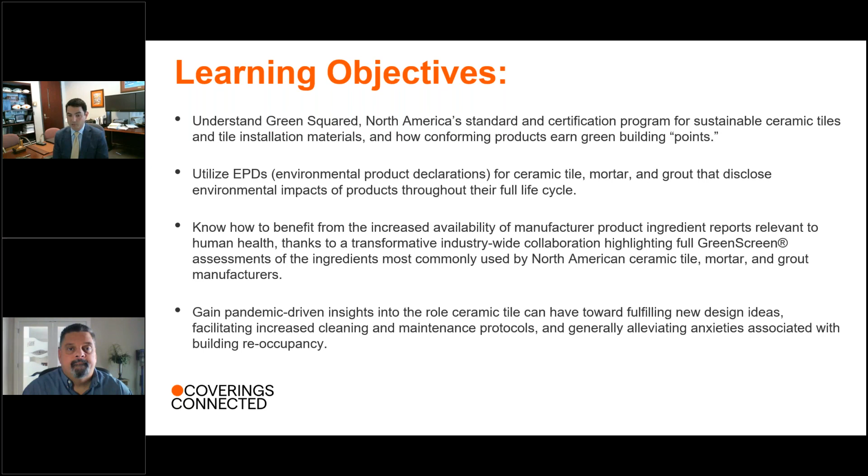Just to set the stage for our conversation, you should know sustainability, and green building in particular, is a vast landscape, as I'm sure many of you have experienced. It's not just the environment when we talk energy, atmosphere, or resources anymore. It's also what products are made out of, how that product ingredient information is communicated. It's also the general well-being of occupants of interior spaces, everything from what they're exposed to with the product to how the product is maintained, especially today from a sanitation standpoint, and how all of this translates into how products are specified, evaluated, and ultimately integrated into green buildings in their design, architecture, and use. All of this comes together with the backdrop of increased consumer awareness, and what's important to society is more mainstream today than ever as it relates to green building.

So we'll walk through all of this, and just to start, keep in mind some key components to consider when we talk about sustainability. Obviously, there's the environment.

That's kind of what kicked off this whole green building discussion years ago, and almost around the same time, human health became just as important, if not more, than the environment when it comes to what designers and specifiers look for in products and how products work together. It's not just the products themselves, it's products and how they're integrated into systems and buildings and their design and use. And the suppliers—what kind of information are they providing, and how transparent is this information regarding the products, what they're made out of, how they impact the environment and human health.

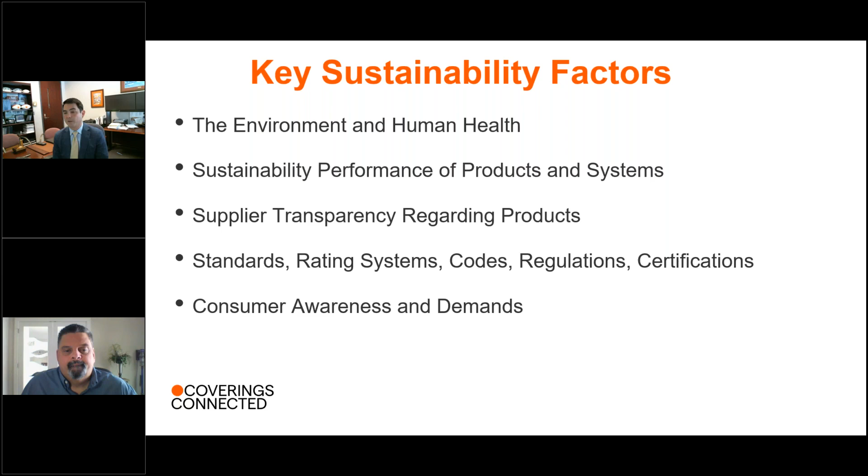So let's try to paint a picture. In doing so, from an environmental standpoint, it's important to understand where we are and where we're going. But first, to do so, it's interesting to look back and think about how we got here, and take a walk down memory lane.

Environmentalism as we know it today can be attributed to the late 60s, early 70s, when a couple of accidents that really had harm on the environment spawned new initiatives such as Earth Day in 1970. In the decades that followed, you saw a general increase in social awareness on environmental issues. This inherently translated not just to everyday life, but also to the buildings and architecture that we're exposed to every day.

I think I saw a study one time that humans spend the vast majority of their life indoors—something incredible, like 90% of their time alive is spent indoors. So of course, the products and buildings we come into contact with are important, and also their impact on the environment.

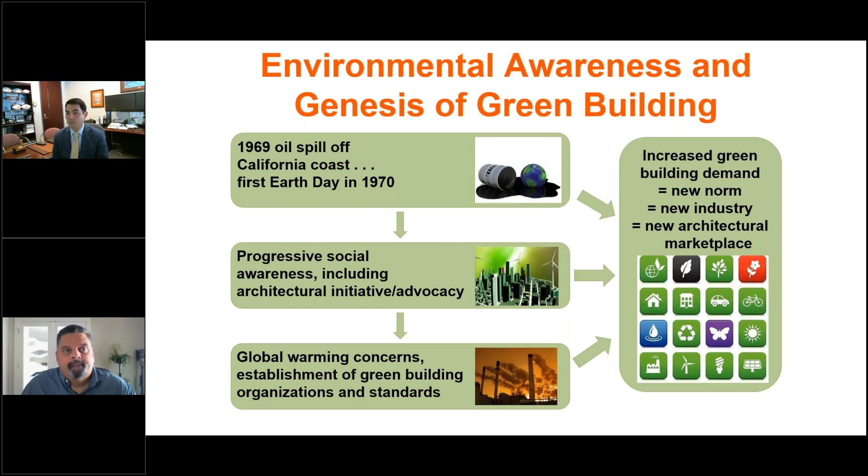Naturally, as we progress toward the close of the 20th century, green building as we know it was established, and it's carried on into the 21st century, now two decades in. Not just global warming concerns, but also human health concerns. All of this gelled into the idea of green building standards and rating systems, which, as you can imagine, changed the market for ceramic tile, but also all other building products. It's really a new marketplace that we're dealing with today, and it continues to change every year.

Similarly, on the health side, if we take a look back, it wasn't too far after environmental issues took off in green building that health issues also took off, most notably early on, the subject of VOC emissions. This is interesting to look back on—the subject of VOCs came to light in the Clinton administration with his executive order. Within one of those orders was the greening of the White House.

That became an interesting case study because shortly thereafter, you saw the formation of the U.S. Green Building Council, and almost right off the bat with LEED and other green building rating systems, VOC and VOC emission criteria were integral. So this was the first departure from just environmental issues into also human health issues.

And then as we got through the early 2000s, you saw this translate over and carry on into the schools and how we're designing schools. The State of California had a big role in that leadership. And then just recently, five or six years ago, you saw the Formaldehyde Act signed into law, where federally we were restricting formaldehyde limits in wood-based composite products.

And you saw the EPA really crank down and enforce those issues. So again, it wasn't just voluntary—you saw some of this written into law.

And in the background of all of this, you saw increasing consumer demands, not just for the environmental aspect, but also for reporting of health information around products. And you're definitely seeing that spike today with the pandemic in the landscape.

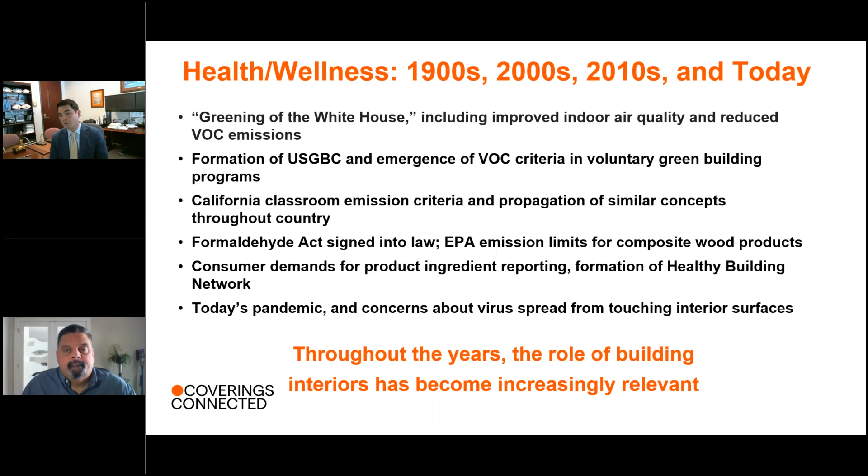So let's shed light on that a little bit. If we look at some of the drivers for why we're so focused on this today, of course we have standards and rating systems. LEED is a big one you hear a lot about, but there are a number of others, which we'll go through toward the end of the talk.

We have codes now, specifications, so it's not just voluntary, it's integrated into the way buildings have to be designed per code. It's not just the building design itself, it's also purchasing and procurement. You see federal recommendations for how to pick the most sustainable products, both from an environmental standpoint and a health standpoint. And you see consumers really driving a lot of these initiatives. There's a lot more consumer awareness, designer awareness, and consumer advocacy in general to have the most sustainable products. That certainly affects the market for not just tile, but all building products.

And of course, anytime there's a major current event, it can't be ignored because it changes the trajectory, not just of green building, but everything we're doing. It'll be interesting to look into, particularly with green building, what kind of an impact it's having.

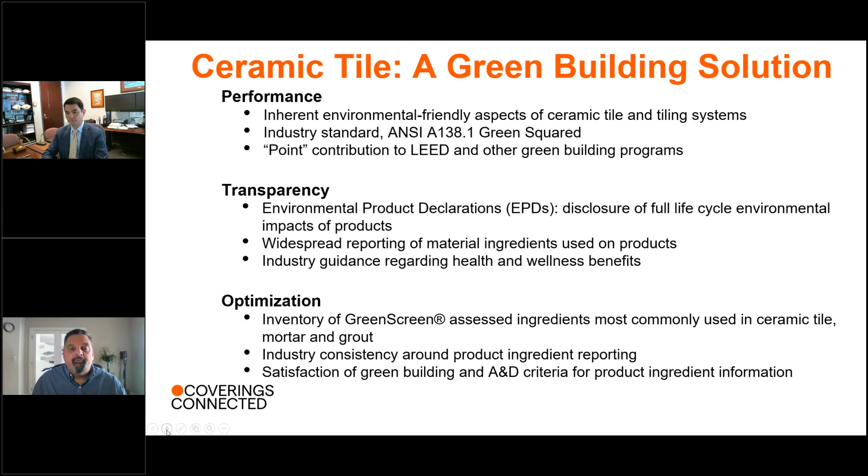We're going to start off with the performance part of the equation, which is our Green Squared program. So to start that discussion, we started talking about what are really the advantages of tile?

What are the things we want to have the discussion about, as opposed to, say, the vinyl industry or the carpet industry having different discussions? First, the tile industry tends to use locally available and naturally abundant resources. So that was a big part of the discussion.

Tile is inherently inert. We're firing it up to over 2,000 degrees Fahrenheit, so there's not a lot of chemicals to come off of tile when all said and done. Material management—it lends itself to being recycled once you're done with it. You can send it back, grind it up, and put it into new tile.

And then, as Bill was talking about earlier, there's this emerging idea of how tile interacts with human health and well-being. That was a big part of the discussion too for Green Squared.

Energy efficiency—I could do a whole talk on just the energy efficiency section of this, because tile absorbs a lot of energy. It's great for exterior, great for interior, helping moderate the amount of energy used for heating and cooling, but that's only one small section of Green Squared.

And then the history and the longevity. We wanted to tie in the craftsmanship of tile and also the fact that it lasts a really, really long time. We'll get into that a little bit as we start to look at the EPD information.

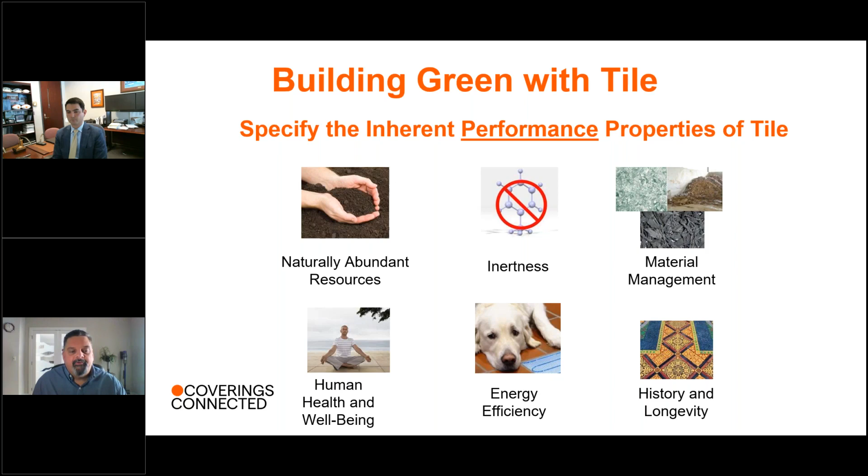So what emerged out of all of that was the Green Squared program. There are two legs to that: one is the standard and one is the certification. We wanted to talk about standardized performance for all these tile products, but not just tile—also the mortars and grouts and some of the installation products that go along with it. So we did include setting materials along with that approach.

The nice thing about this is that all the manufacturers in North America came together to put together this multi-attribute sustainability standard. It's really become the way people talk about sustainability for tile, not just in the North American market, but it was also the framework that ISO is using as they develop their standard as well.

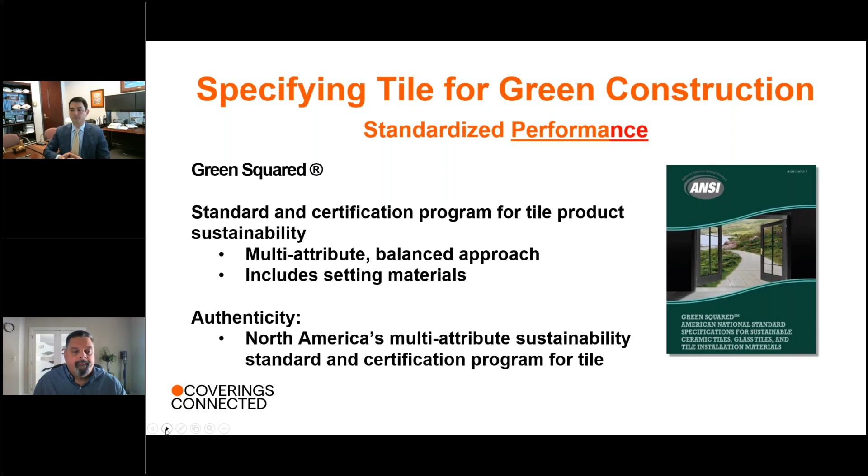So the first part of Green Squared is the standard. It is an ANSI standard, A138.1, but it's actually really 5 standards, because you have the tile segment, the powder installation products like grouts and mortars, the paste and liquid installation products, sheet installation products, and also panels. Each one of these categories gets its own set of requirements to get certified under the Green Squared program. So it's really 5 standards in one.

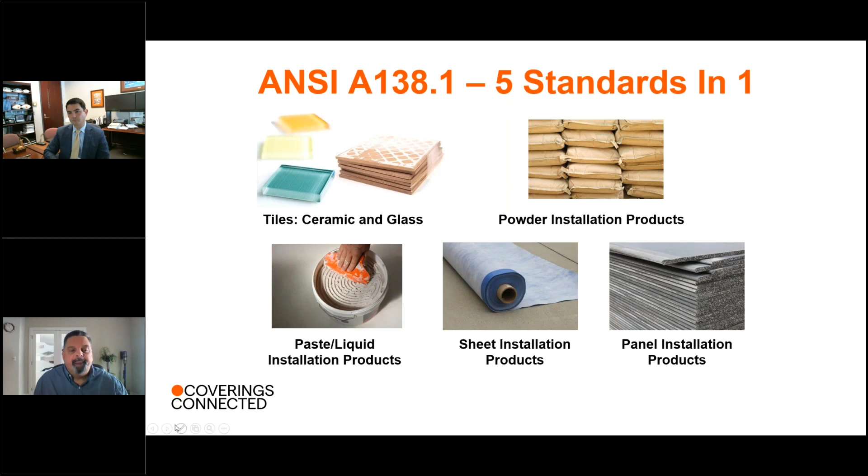Why do we call it a multi-attribute certification? What are the multiple attributes that we're taking a look at? In this case, we're taking a look at product characteristics, the manufacturing of that product, the company that's making it, the corporate governance. We're adding in some points for innovation, and also we're taking a look at the end of life.

Under manufacturing, you have the raw materials, you have the energy inputs, you have optimization there to try to make sure you're doing the manufacturing in a sustainable way. We look at the product itself, so we pull out things like recycled content. We talk about things like VOCs. So the inherent product characteristics are discussed in ANSI A138.1.

The innovation credits - there are some really neat things going on with tile right now. There are tiles that actually make your environment better in the building in which they're installed. Some of them work on ozone, some of them actually kill microbes. So part of that germaphobia part of this whole presentation is dealt with under these innovation credits.

Corporate governance is making sure your supply chain is doing things right, looking at child labor and ethically sourced materials, and also that you're doing things right internally - how is your corporation set up, are you trying to optimize your sustainability function and not just greenwash the whole thing. And then end of life, you take a look at things like recycling the products back in once they're done in the building.

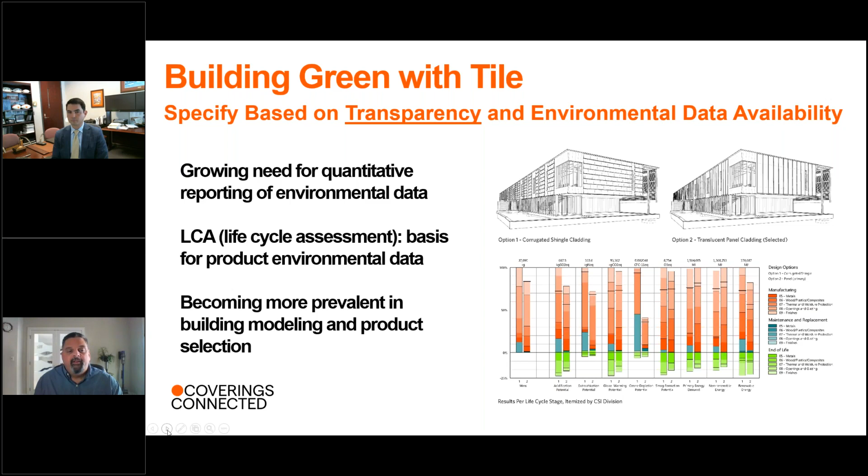The tile industry had to do that three times. So what we did was not just the one for tile, but also for mortar and for grout. Again, this was unique, this is innovative. Other industries might take a look at just carpet but not the adhesives, or just vinyl and not the adhesives that go with it. For the tile industry, we were really trying to get to that whole system.

When you're installing tile, here's what the environmental product declaration looks like. So we had all three of these developed. This took, again, years of development work, years of working behind the scenes to come up with product category rules and some other things that had to be developed even to put out an EPD.

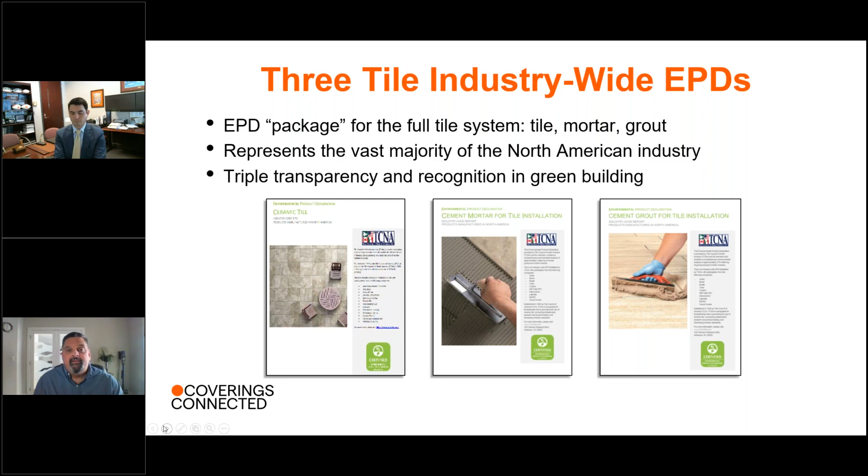The nice thing though is by doing both tile, mortar, and grout, you're getting three times the bang for your buck. The way the LEED credit is written, you have to have a certain number of products, you have to have a certain number of manufacturers, and now just by using a tile system, you're bringing in three of those instead of just one.

Taking a look at the mortar EPD, you see all the big names in mortar manufacturing in North America were represented. It's the generic cement mortar for tile installation. So by putting all of the mortar manufacturers' information together, TCNA acted as the clearinghouse. Mortar manufacturer A wasn't seeing the information from mortar manufacturer B, but at the end of the day, there could be an industry average EPD, which then we could compare individual products to later on.

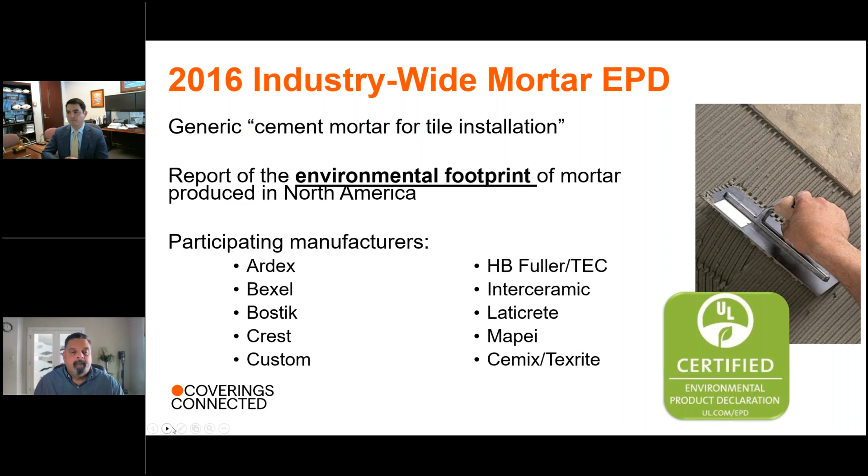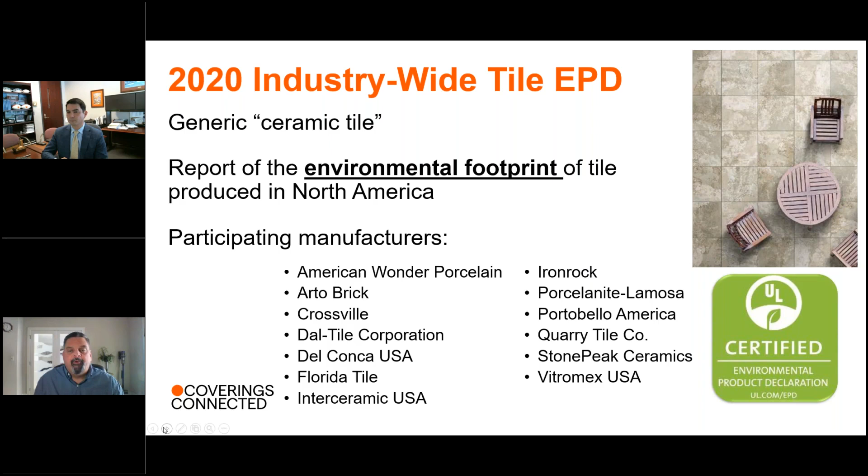Same with grout. The same companies that worked with the mortar EPD also work with grout. You're trying to get to that environmental footprint of what goes into making a grout and using a grout. And also the same thing for tile - you can see there the list of all the tile companies that participated. So all these companies now can use this industry average information when they compare their specific products to try to get more points under the LEED program and other green programs as well.

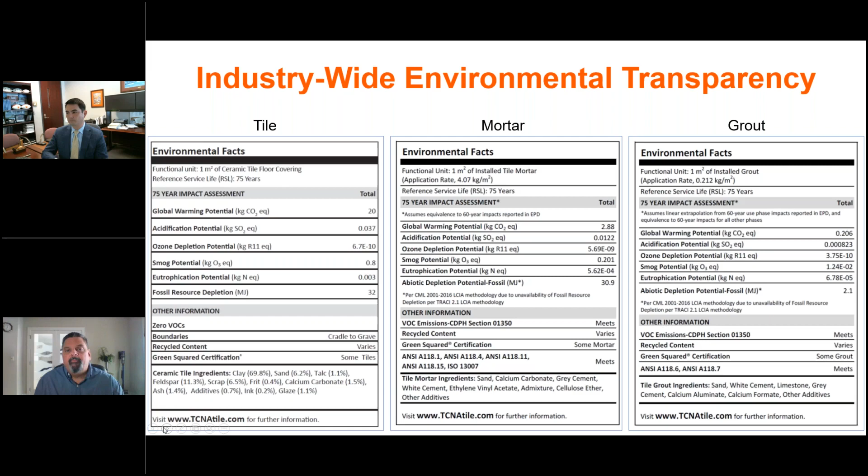The other thing I'll point out is these are based on 75-year impacts. So what this is assuming is that if you install tile in your building, 75 years later, that tile is still going to be there in pretty much the same condition as when you first installed it. This is different than other flooring manufacturers because their products are designed with maybe a 20-year life or even less.

So how does tile measure up? Glad you asked. What we've got here is a comparison of just one of those elements of the EPD, the global warming potential. And kind of the idea everybody had in the back of their head is because you have to heat tile up to 2000 degrees Fahrenheit or even more, and then cool it back down, that there's a huge global warming potential because of all the gas or other, maybe even electric it takes to heat it up and then cool it back down.

But what you find is, as you start to compare the numbers, that's not really what's going on. Because vinyl and carpet have to be replaced regularly, because there is a lot of energy that goes into them, a lot of petroleum that goes into those products, the global warming potential for those products is actually quite a bit higher, orders of magnitude higher in some cases than that for tile. So you really start to get the numbers so you can do an accurate comparison between item A and item B when you're doing your building.

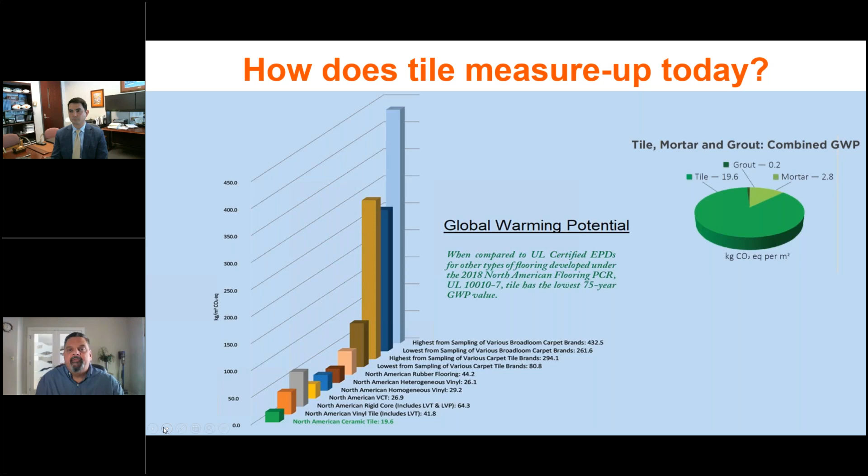All right, so we've got our green square certification. We have our industry average EPDs as a way for the tile companies and the mortar and grout companies to get to their product specific EPDs. Those were relatively straightforward. They took a lot of time, it took a lot of data, but there was a blueprint that had already been figured out to get there.

Now we started to get into the material ingredients section of it. And material ingredients and the whole idea of transparency of what goes into products - it was a mess.

So there's a right to know section of this, a responsibility for the manufacturer to disclose, and it all boils down to transparency. Being a manufacturer myself, there are certain parts to our product compositions we don't necessarily want everybody to know. It's not really a transparency issue, it's more of a competitive issue, because those are the secret sauce that makes the products work. So a lot of that had to be juggled to get to this industry average idea, especially for ingredient disclosure and transparency.

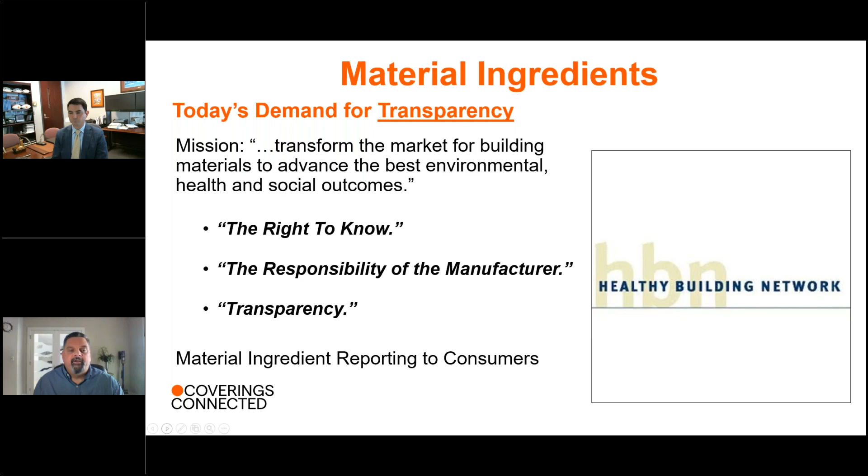But we didn't really have a choice, because architects and end users were starting to demand this information. A few years back, 30 major architectural firms got together, compared notes, and said they wanted this disclosure and transparency info. They sent letters to all their suppliers saying if you don't give us what we're asking for, we're not going to use you anymore, we're going to delete you from our catalogs. That was really a shot across the bow of the tile industry that we had to get our acts together and start giving them the information in a format they could use.

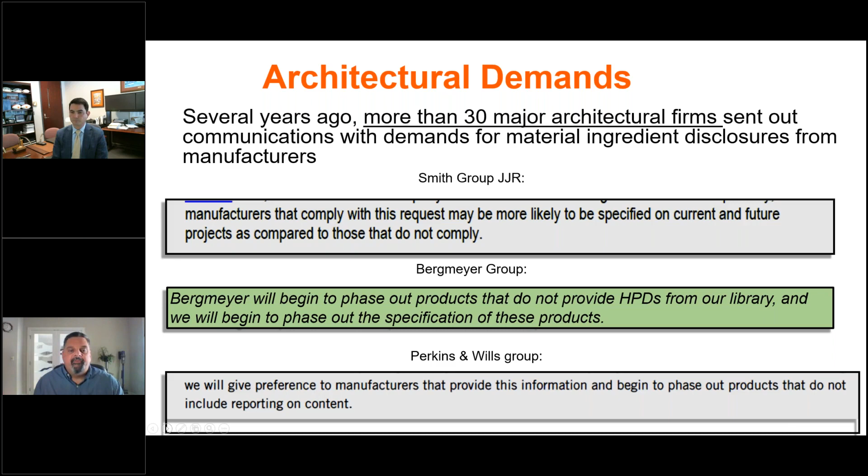And it wasn't just the architects. There was a lot of confusion around how to bundle up this information in a way people can consume and understand. You've got things like the Living Building Red List, Green Screen, which pulls from a number of different sources as it looks at individual ingredients, Cradle to Cradle, and then the health certificate that comes out of the Cradle to Cradle list. There's just lots of what I'll call red lists out there - products or components people don't want to see in particular products. Some are governmental, some are non-governmental, but there's hundreds of them. So somehow you have to make some sense out of all this chaos.

So to do that, there's a bunch of different methods. Health Product Declaration probably has the best name recognition, the HPD, because of LEED's credit. But LEED's credit also allows you to do your own Green Screen, so you don't necessarily have to do an HPD specifically. Declare labels are also very similar to HPD, and the Declare label is trying to get the information into a form that people can easily digest and compare. Manufacturer inventory is kind of the starting point, the jumping off point for most of these other standards.

And that ties in with the USGBC program, but also there's Product Lens. Google has their own way for Google buildings that they're evaluating products going into those buildings. Mindful Materials has a list. So you can see there's a lot to this whole transparency and chemical ingredient disclosure that we had to get into. And because this is kind of an emerging field, and this is where we're at right now, having brought you up to speed from 2008 to current, I'm going to hand it back over to Bill.

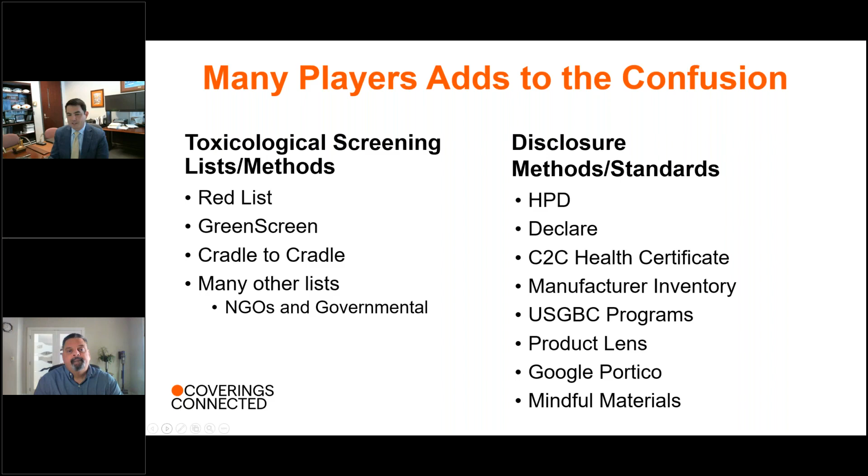Yeah, thanks Dan. Let me get into where we're going. Let me briefly address a question that came in - we're providing a lot of information about Green Squared and how that helps with LEED and EPDs, which is true. That's an important piece of this as we're wrapping our minds around the landscape of sustainability. As we previously discussed, there's the environmental performance side, the environmental transparency side, and now as Dan has set the stage, there's the material ingredient transparency side. And admittedly, it is very LEED focused because USGBC has taken a lot of initiative in these arenas. But I should note it's not just LEED.

There are many other requirements, as I mentioned previously, green globes, federal purchasing requirements, building codes, etc. Green Squared has gotten us to where we are today based on our American national standard, ANSI A138.1. But this is a huge international discussion, and as international needs evolve and international stakeholders come into the mix, international standards ultimately get written around sustainability. We're in a great position in the North American market because we have something to grow and take into account a lot of the international interests.

That's where we're heading on the environmental front, and even more significantly on the material ingredient front. We're at a very important transition point now because the tile industry discussed what we needed with regards to material ingredients. The last slide Dan showed should give everyone a headache when you look at all these lists, all these requirements for reporting, whether it's HPD, declare label, or manufacturer material ingredient inventory. There's all kinds of options out there.

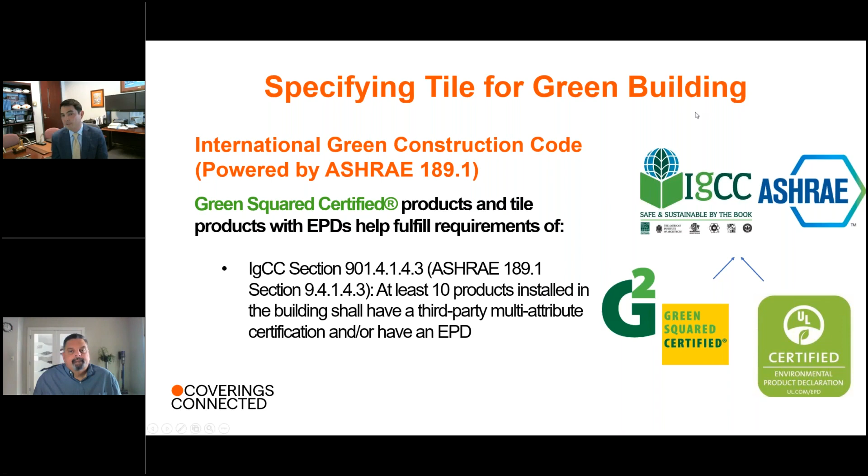So not just from earning points in LEED and Green Globes, you'll see it perhaps written in, perhaps you're already starting to see it written into building codes, that in order to meet a code requirement, you'll need to provide this information on behalf of the products being used.

On the residential side, there's a standard called the National Green Building Standard, which about 10 years ago NAHB took on this initiative to develop. Pretty much from the beginning, Green Squared was referenced as the tile standard for sustainable products and life cycle information, and more recently EPDs were referenced. So this is kind of like LEED - you can get points on projects pursuing certification to the NAHB's National Green Building Standard.

Then a few years back, the EPA came out with federal purchasers' recommendations for what standards and labels need to be used in the procurement of sustainable products. The industry was heavily involved in the flooring panel that helped EPA develop these recommendations. So Green Squared is recommended by the US EPA and all US government sustainable purchasing initiatives.

You may have already seen this show up, particularly if you're involved in government projects, and you also see Green Squared written into the GSA facility standard, the P100 standard. I tell you all of that to highlight that we're well positioned today, and also for the future, because our tools address transparency with our EPDs and material ingredient framework, and performance with our minimum standard Green Squared, which will continue to evolve as international criteria get developed.

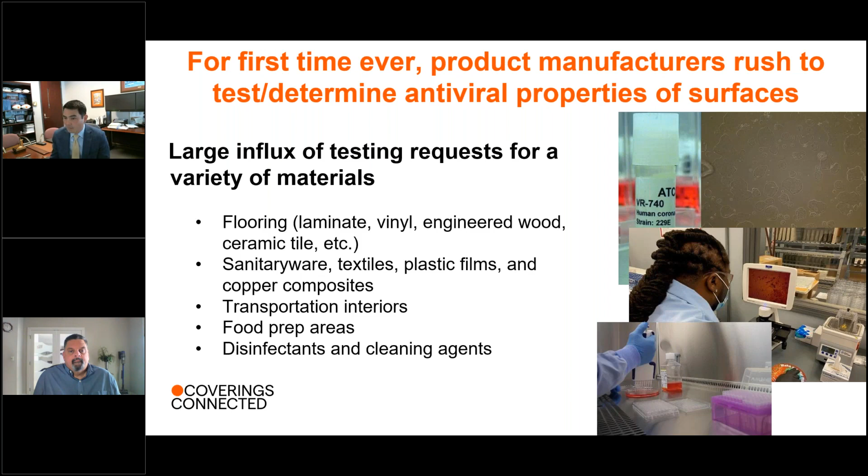What we learned in doing all this is there's a huge disconnect between building experts and microbiologists. Believe it or not, there's no consensus standard on evaluating the efficacy of antiviral surfaces and agents, and no standards for determining how long viruses live on surfaces. So a lot of the infographics you see in the news are based on variations in research from different labs, meaning there's no real consistent source of information for all of this.

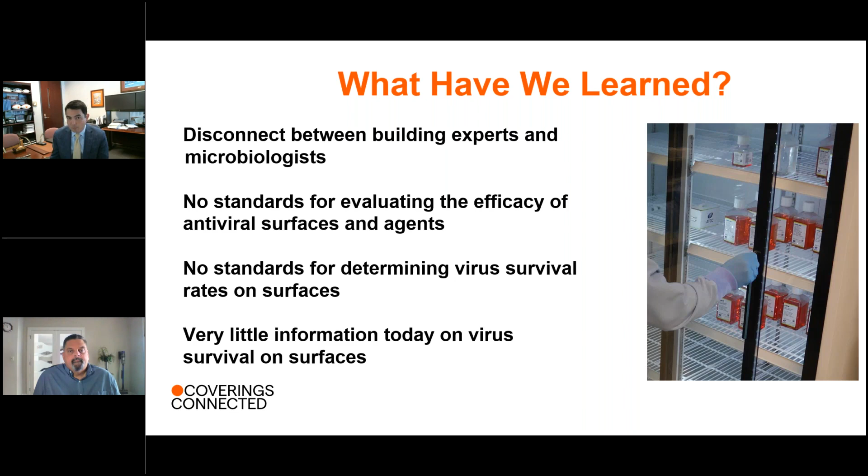So what we learned was, through the work we were doing, we could start to connect the dots a little bit and help develop these answers, finding out how many products we need to test to get the confidence to develop insights into how effective coatings are compared to those that have been used for years on antimicrobials in general, and how those work against surrogate strains of the SARS-CoV-2 virus.

Inherent glazing components, how are those effective? We found that some of the metals already in glazes are effective in shortening the survival rate of viruses, and sometimes have antiviral properties. So we were developing a lot of insights.

We've been involved in different standards committees, and because of these tests, we're really starting to gain experience and help lead new efforts to develop test methods for virus survival. This is just the tip of the iceberg here. We anticipate a lot more research and a lot more testing.

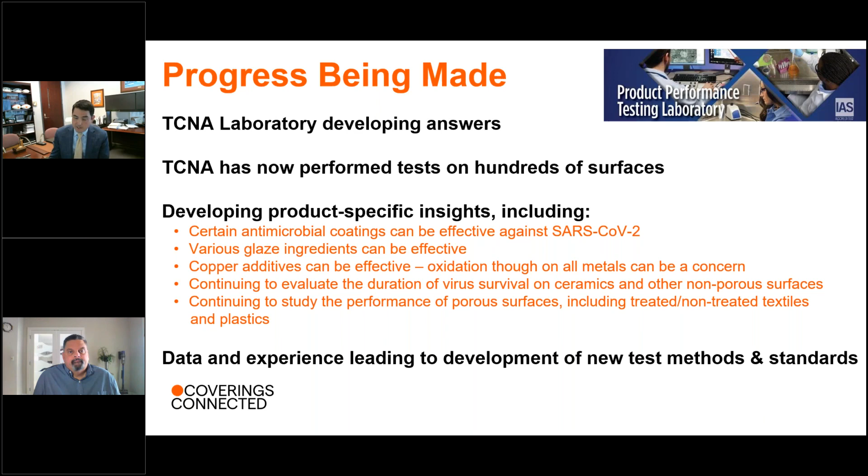Because how this translates into sustainability and green building, we certainly anticipate that designers and specifiers—if we have the standards and the capability to test, meaning interior surface labs and industries in general—we're going to see requirements for this information so the right products can be used in the right areas, especially those we come into contact with every day. In fact, you're already starting to see it.

USGBC, shortly after the onset of the pandemic, developed COVID-19 resources on how to specify safe interiors that minimize the transmission of virus spread. One of the components of this safe specification had to do with the cleanability of surfaces and the impact of cleaners—not just the impact of cleaners, but what surfaces can be easily cleaned and wiped down, and how well those surfaces can be cleaned from an antiviral efficacy standpoint.

And so you saw this very early on carry into two new LEED credits, both called Safety First—one on cleaning and disinfecting your space, which admittedly is very ambiguous in what the requirements are. It's just a starting point. But one consistent thread in there is that for LEED projects now, you're going to start to see specification of products that can be easily cleaned, easily disinfected, and also have the durability to withstand more stringent cleaning regimens.

And you're going to see an impact on re-entering your workspace, how spaces are designed to minimize human-to-human contact, how to minimize contact with surfaces. This is a blank canvas to rethink how we're designing spaces and the products we're using as building reoccupancy continues to increase. You'll see these carry into LEED projects, and I anticipate that for years to come this subject of virus transmission will be another component of all things green building, not just LEED, but codes, standards, and other rating systems.